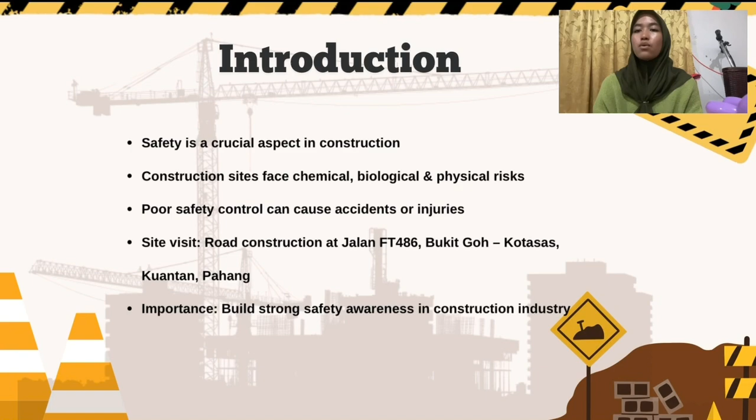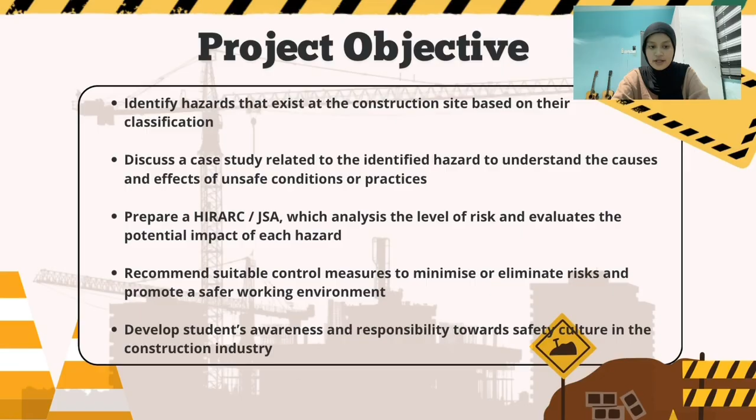Our first objective is to identify hazards that exist at the construction site based on their classification. Second, discuss a case study related to the identified hazard to understand the causes and effect of unsafe condition or practice. Next, we prepare a HIRARC which analyzes the level of risk and evaluates the potential impact of each hazard. Next, recommend suitable control measures to minimize or eliminate risk and promote a safer working environment. Lastly, this project aims to develop student awareness and responsibility towards safety culture in the construction industry.

Classification of hazard. So, for this part, we talk about the types of hazard that can happen at a construction site. Basically, hazards are divided into a few categories. Here we'll focus on physical, chemical, and biological hazard. First, physical hazard. A physical hazard is something in the environment that can cause harm to our body, even without touching it. It usually comes from unsafe conditions at the site, like noise, heat, vibration, or falling objects.

For example, a lorry reversed by itself because the handbrake was not fully engaged. This is very dangerous because the uncontrolled movement of a heavy vehicle can cause serious accidents. Next, soil fell onto the top of the lorry. Falling material can injure workers or damage property. Next, a worker did not hear the warning because they were wearing earbuds. When a worker cannot hear properly, they become less aware of their surroundings, which increases the chance of accidents.

Next, a muddy road causes cars to avoid the site. Muddy or dirty roads can make vehicles lose control and cause traffic accidents. And the last one, uneven worker pathway. Uneven or slippery surfaces can make workers slip, trip, or fall. So all these are examples of physical hazards that can harm workers or other people nearby.

Chemical hazard. Next is chemical hazard. This happens when workers are exposed to dangerous chemicals, whether by inhaling, touching, or swallowing them. It can harm people, damage property, or even affect the environment. For example, dust at the construction site. Fine dust particles can cause breathing problems and also make it hard to see clearly. So even something that looks small like dust can be a big hazard if not controlled properly.

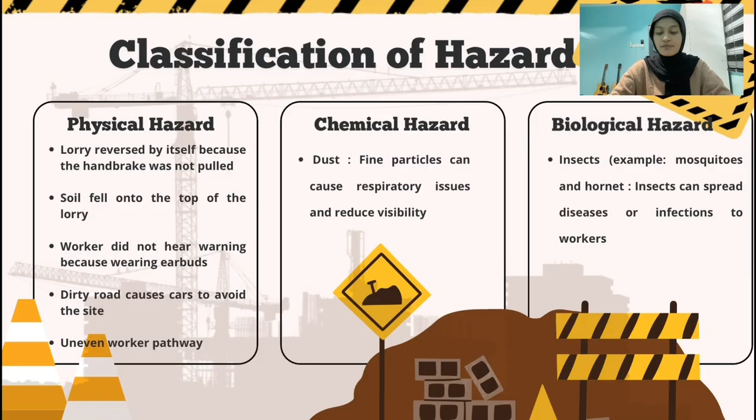Lastly, we have biological hazard. This type involves a living thing that can cause harm and spread disease, like bacteria, virus, or insects. For example, insects such as mosquitoes or hornets. These insects can bite or sting workers and sometimes even spread disease or cause allergic reactions. That's why proper hygiene and pest control at the site are very important. In conclusion, we can see that hazards at a construction site come from many different sources: physical, chemical, and biological. Recognizing them really helps us plan better control measures and keep everyone safe.

Next, I will be explaining about the case study. For this case study, we focus on a situation observed during our visit to the road construction site. This activity took place during the earthwork stage where an excavator was loading soil into a tipper lorry for disposal.

During this operation, we noticed that the lorry driver remained seated inside the cabin, even though the excavator was operating directly above the vehicle. This creates a high-risk situation because any mistake or equipment failure could easily result in an accident. The main hazard identified here was the risk of the excavator bucket swinging or falling unexpectedly. This could occur due to hydraulic failure, loss of pressure, or even operator error.

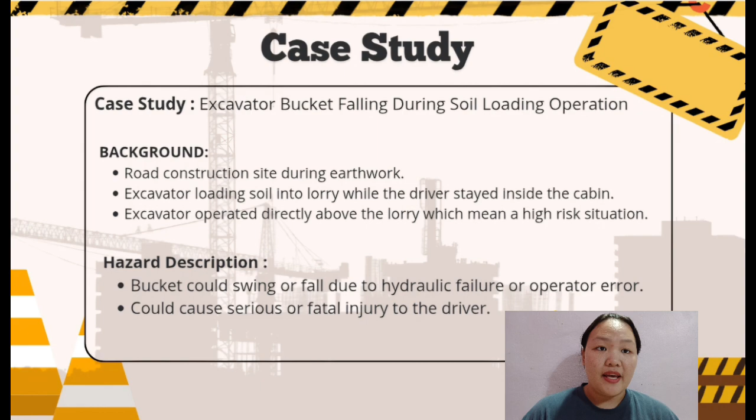If the bucket or its load of soil were to fall, it could strike the cabin roof and cause serious or even fatal injuries to the driver. This situation shows how critical it is to enforce strict safety procedures, especially ensuring that drivers exit the vehicle and stay in a designated safe zone during loading activity.

Continuing from the previous slide, let's discuss the main cause and preventive action for this hazard. During our site observation, we identified several root causes that contribute to this unsafe condition. Firstly, the driver stays inside the cabin during the loading operation, which goes against standard safety practice.

Secondly, there was no exclusion zone or signalman to control vehicle and equipment movement, meaning communication was unclear. Thirdly, there was poor coordination and supervision between the excavator operator and the lorry driver. Lastly, there was a possibility of hydraulic leaks or pressure loss which could cause sudden or unintentional movement of the bucket.

To prevent such incidents, several countermeasures are recommended. The driver must always exit the lorry before loading begins and wait in a designated safe zone. The site team should establish clear exclusion zones with warning signage to keep workers and equipment safely separated.

It is also important to conduct daily inspection on the excavator hydraulic system to detect any leak or pressure issue early. Finally, clear communication and active supervision must be maintained between operator, driver and supervisor throughout all loading operations. This action will help minimize the risk of accidents and ensure a much safer environment during work activities.

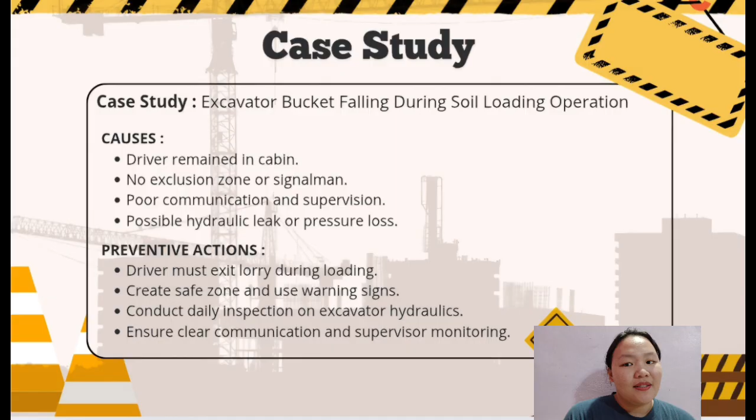Next is Job Safety Analysis, or JSA. The JSA breaks down the activity into several job steps, identifies potential hazards and risks, and suggests suitable countermeasures to ensure the safety of all workers involved. The first job step is positioning the lorry near the excavator for soil loading.

In this step, the main hazard is that the lorry may be parked too close to the excavator, which could result in a collision or struck-by incident. To prevent this, workers must maintain a safe distance, clearly mark the exclusion zone, and assign a signalman to guide the driver during positioning. The second job step is when the excavator is loading soil into the lorry.

Here, the potential hazard is the bucket swinging or falling due to hydraulic failure or operator error. This could cause the driver or nearby worker to be crushed, leading to serious or fatal injury. Therefore, daily hydraulic system inspection must be carried out and only trained operators are allowed to handle the excavator. It is also important to maintain a safe loading distance at all times.

The third job step is when the driver remains inside the cabin. The main hazard is that falling soil or the bucket could strike the cabin, causing serious or fatal injuries. To control this risk, the driver must exit the lorry and wait in a designated safe zone during loading. In addition, all workers must wear appropriate PPE such as a safety helmet before entering the work area.

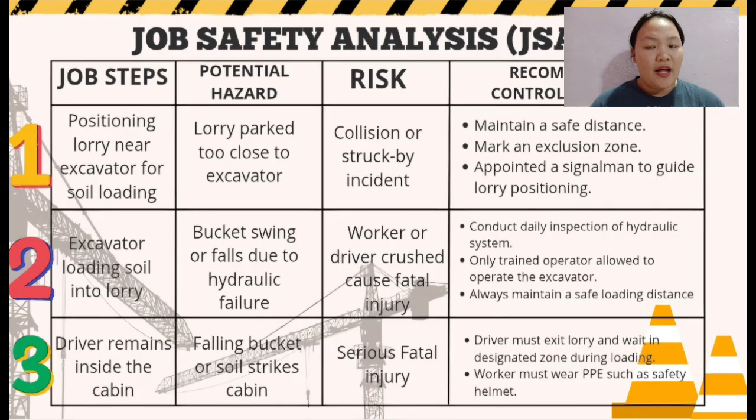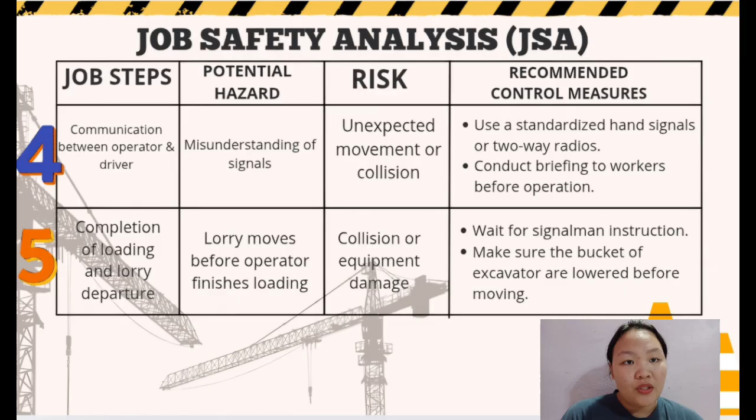Here, the potential hazards are the lorry moving before the operator finishes loading, which has risks such as collision or equipment damage. The recommended countermeasures are to wait for signalman instruction and make sure the bucket of the excavator is lowered before moving.

Okay, now I want to talk about the safety report. First, elimination: restriction of using earphones in hazardous areas. Workers did not hear the warning since they were wearing earphones, increasing their risk of physical harm. To prevent this risk, it's critical to adopt a policy prohibiting the use of earphones in hazardous places.

This is directly related to Section 15 of OSHA 2022, which stipulates that employers must ensure the safety, health, and welfare of their employees in the workplace. According to the most recent amendment, Section 18B, companies must conduct risk assessment and, if risks are discovered, implement measures to decrease them, such as administrative control or elimination of hazards like earphones.

Engineering control: engineering measures such as regular maintenance of the building site road and the installation of a drainage system to minimize muddy conditions can help to reduce the risk.

Section 15 of the OSHA Act of 2022 as well as the most recent update to Section 18A require employees to take reasonable precautions to ensure on-site safety, including maintaining a safe work environment. To uneven worker pathway, actions such as building and maintaining even pathway as well as installing safety barrier or fences are as needed.

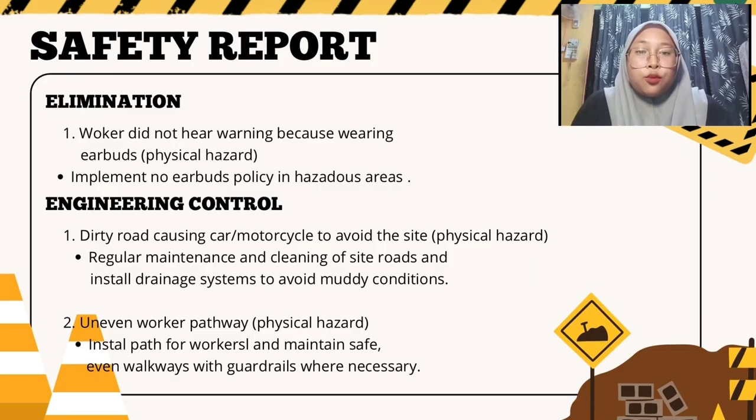Are consistent with Section 18B of OSHA 2022, we require risk assessment and the implementation of controls to ensure safe working conditions and prevent accident caused by physical hazard. This is also supported by Section 26A, which gives employees the right to leave if there is threat and their employer fails to take action.

Next, administrative control. Every risk, such as vehicle operating without handbrake, soil dropping from truck, and dust in the workplace must be handled by systematic administration. As an example, ensure the vehicle safety check and protocols, such as applying the handbrake before parking. Ensure driver exit the vehicle during loading operation and provide appropriate safety briefing.

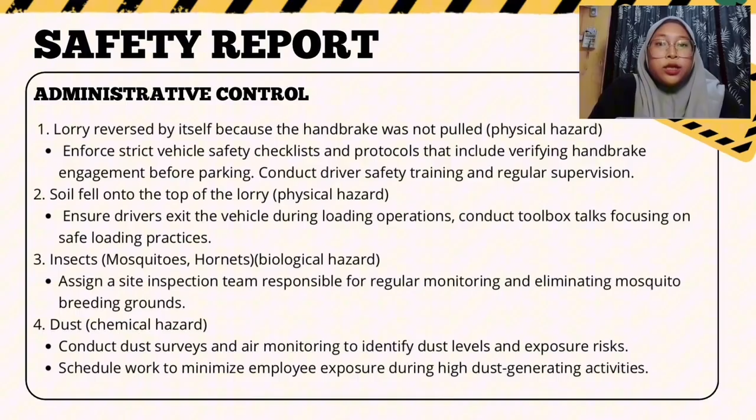Assigning a team to regularly monitor and destroy mosquito breeding places, conducting dust survey and air monitoring to determine dust levels and plan work to reduce worker exposure. All of these tasks are related to Section 15, 18A, 18B of OSHA 2022, which emphasize the importance of employers and principals during risk assessment, hazard control, and emergency procedure, as well as ensuring workers are exposed to minimal hazard.

Lastly, personal protection equipment (PPE). When working in zone where there is a risk of insect like mosquitoes, workers should be told to wear proper protection apparel such as long sleeve and long legs. This action is in accordance with Section 15 of the OSHA Act 2022, which requires the employer safeguard all employees from biological risk at work by providing PPE and appropriate control measure.

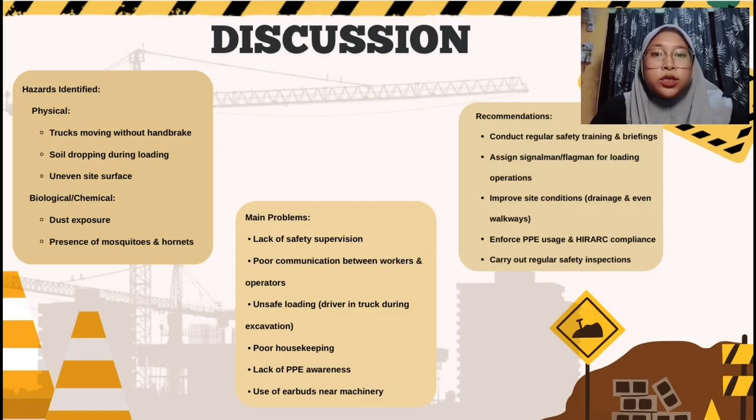Employer must carry out risk assessment and put in place suitable control for the biological hazard in the workplace in accordance with OSHA 2022, Section 15 and 18. Under the Act's new provision, non-compliance might result in heavy fine of up to 500,000. Next, I will continue with the discussion part.

Based on the site visit at the road construction project in Jalan FT 486, several types of hazards were identified at the site. Among the physical hazards were truck moving without a handbrake, soil falling during loading, and uneven surfaces that could cause workers to slip or trip. There were also chemical and biological hazards such as dust exposure, mosquitoes, and hornets that could affect workers' health.

From our observation, the main problems were the lack of safety supervision, poor communication between workers and operators, and the improper use of personal protective equipment, such as wearing earbuds near machinery. This issue showed the safety procedures were not properly followed at the site.

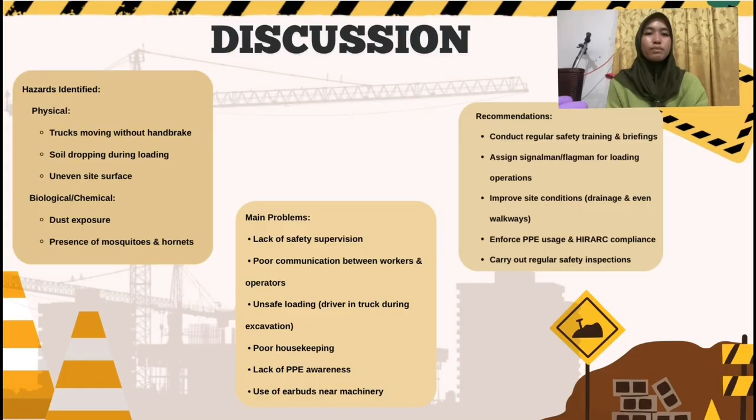To overcome this problem, several improvements are recommended. For example, conducting regular safety training and briefing, assigning a signalman during loading activities, improving site drainage and walkways, and enforcing proper PPE usage and HIRARC compliance. By applying these control measures, we can create a safer and more efficient working environment at the construction site.

Lastly, our slide is conclusion. The safety evaluation of construction activity for the upgrade of Jalan FT 486, persimpangan lampu isyarat Bukit Goh ke Kota Sas, daerah Kuantan Darul Makmur, found a number of physical, chemical, and biological hazards that pose considerable dangers to workers

and the site. Key physical hazards were lorry movement owing to loose handbrake, falling soil during loading, noise isolation for workers wearing earbuds, unclear routes generating traffic problem, and uneven walkways increasing slip and trip risk. Biological threats such as mosquito were identified as potential vector of disease spreading, while chemical hazards such as dust exposure were identified as respiratory risk.

A comprehensive hazard identification, risk assessment, and risk control (HIRARC) procedure was used to recommend appropriate controls that are consistent with the control hierarchy. Complete compliance to this recommended control measure, proactive guidance, routine maintenance, worker training, and efficient communication are crucial for promoting a safer working environment, reducing hazard, and preventing on-site accident during the upgrade project.

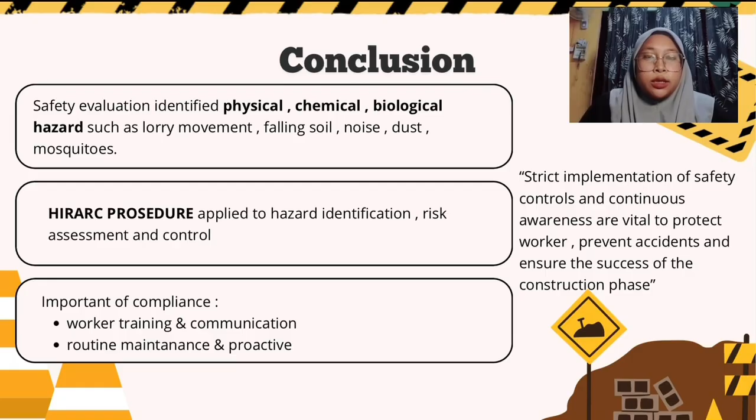To sustain a strong safety culture throughout the building process, the project team and workers must maintain a high level of safety knowledge and accountability. And last for me, strict implementation of safety control and continuous awareness are vital to protect workers, prevent accidents, and ensure the success of construction phase.